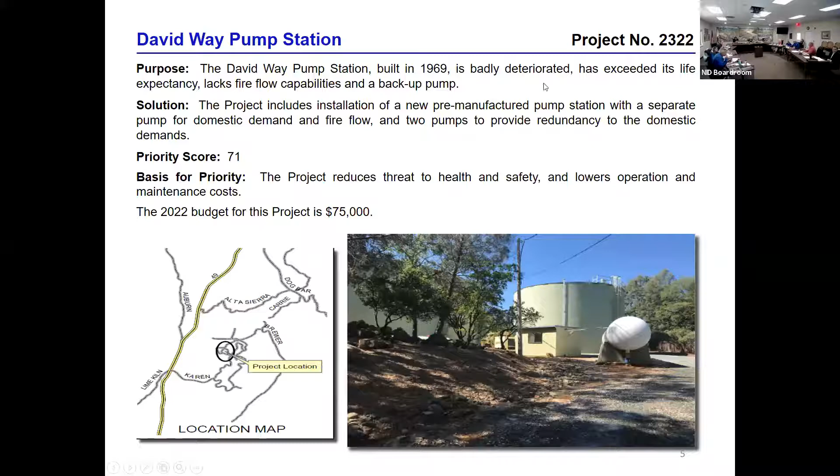I lost my train of thought. The clarifier and the paint, so okay. We'll be bringing that forward here probably in October, recommending that we use the money we had slated for this work to do the clarifier work this year. So, this work for Lake Wildwood would be for next year, which is the backwash pumps and the drying beds. We expect that to take place over a 2-year period, because we can do one drying bed at a time and ease through that, keeping the treatment plant running and continuing to move forward.

Any particular questions on that? Yeah, my question when I read this was, is this the big project that was proposed that needs to happen at Lake Wildwood Treatment Plant, or is this the interim fix-it project? The big project, capital, $6 million plus, rebuild of the whole thing? No, correct. This is not related to that.

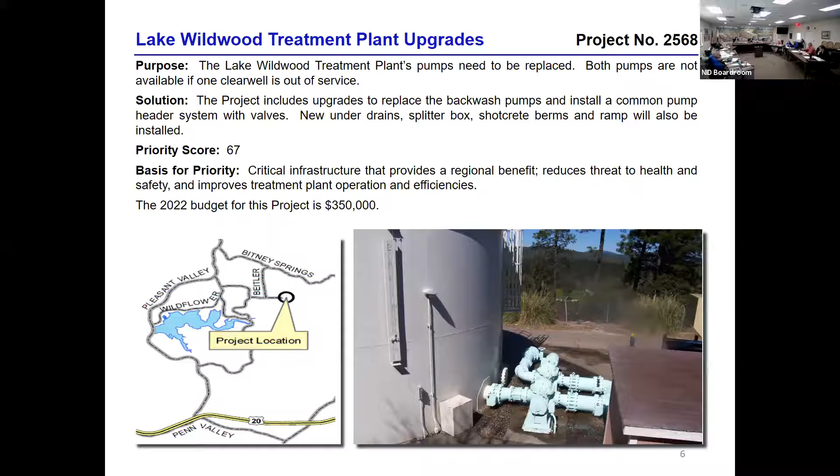This has got to keep it running. This was one that was originally identified as additional work that needed to be done when they did that review of the bed project. They identified the intake screen, as well as the drying beds and the backwash pump in the HDR report. That's why that needs to be done, and that's related to that. We've got the drying beds that are no longer really meeting requirements. Now we have to have membranes, and this one does not have those, as well as other drains that need to be installed and improved, et cetera. So that's just a little more background, because we're gonna be bringing something back to you with regard to Lake Wildwood and to clarify that.

So just to be clear, the 350 will replace the internal mechanism on the clarifier as well as paint it? No, the 350 you see here is actually for the drying bed and the backwash pumps that we're proposing to do next year. What we're gonna be bringing to the board in October, we had 600 in the budget to do this work originally, the drying beds, backwash pumps, and intake screen. We're recommending that we use that money this year to replace the internal parts of the clarifier, paint, clean, and repair the clarifier tank in this year's budget, because it's in pretty deteriorated condition. Once we pulled it down to do maintenance, we just need to replace the inside, and we can do that relatively efficiently.

Okay, so how much is that gonna cost? Well, it says right here, 350 or something. No, that's the confusion - we're probably in the 7 range ultimately for that one, on top of this 350. Because we have money in this year's budget for this work, as well as maintenance had money in their budget for the painting of the clarifier tank, so we're gonna be requesting that we combine those two and do all that work this year.

Great. How long does that likely push out having to spend the $6 million? At this point, we wouldn't be recommending that we move forward with an expansion of the plant. I don't think we're meeting the conditions, especially with the improvement of the clarifier and the surveys. Oh, that clarifies my question. Yeah, me too. Instead of $6 million, we're spending $1 million.

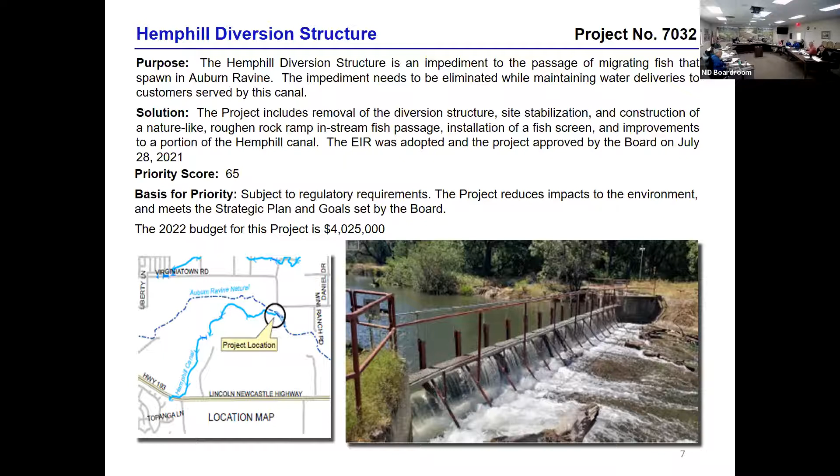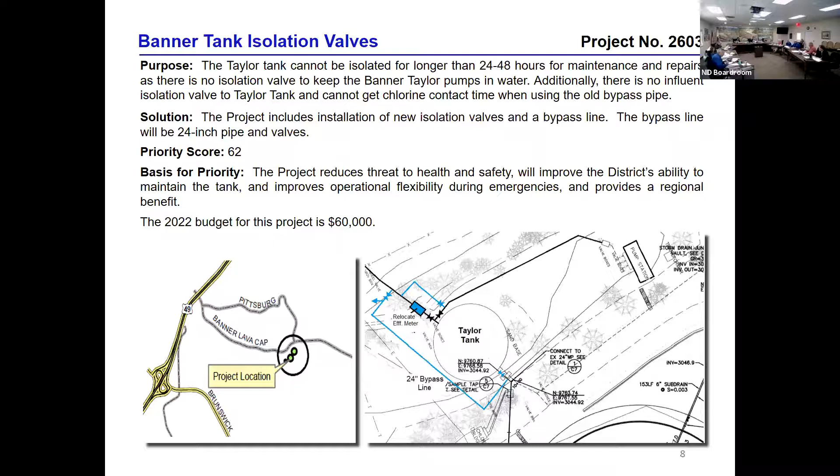Is this what we walk on every time we come here? Don't think about it, don't look at the pictures. I know, really—there might be another door you can go out. Yeah, I got it.

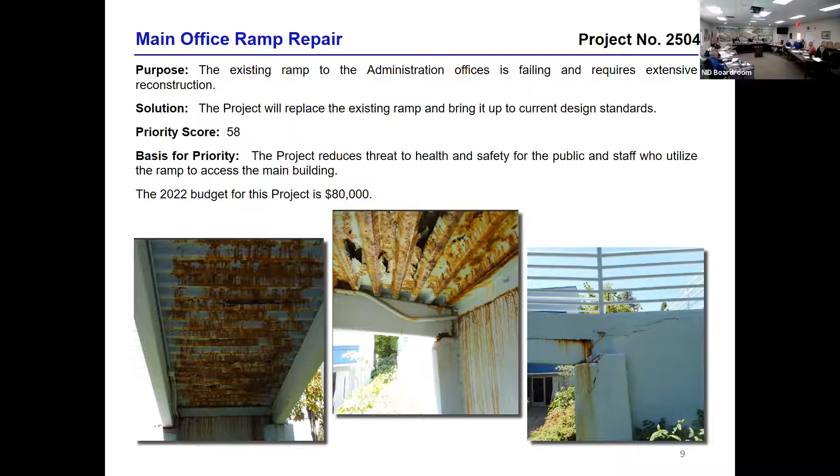Sorry, I lost it. Oh, back-to-back stuff, messing with me.

It seems like this is one that's been on the list for years. I've been reading about it on the current list, so it's fine. Part of it is we know we need Caltrans right-of-way, so that's a challenge.

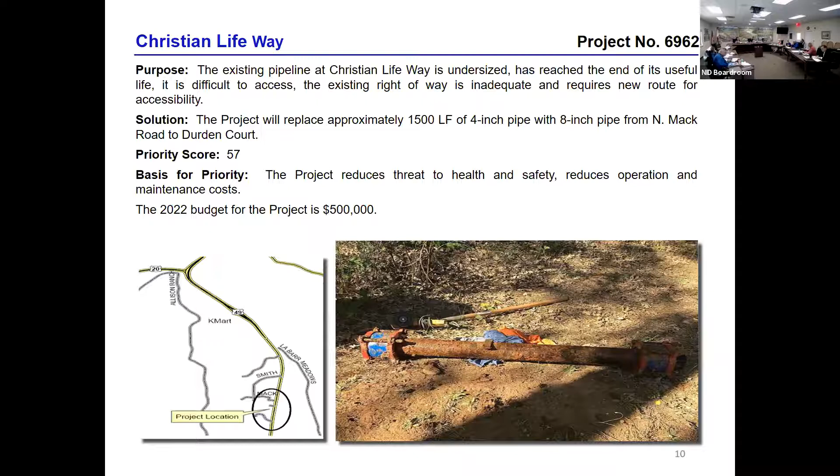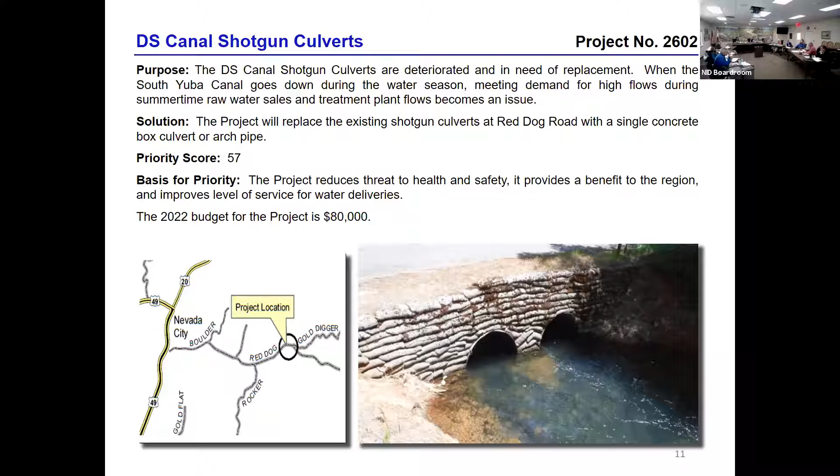Next one after that is North Bay. There's some pictures there, I believe, of this one—you kind of get a feel for it. Again, I think we have the same kind of issue with roots, et cetera, with this old AC pipe, which is—I'm assuming everybody understands what AC pipe is—for the most part usually installed in the 60s and 70s. That's asbestos cement pipe. So, how many customers are on this line?

So, there's roughly 50 connections on that line. And this one's a challenge too, because we're going to have to bore and jack under Highway 174. Yeah, oh wow, so not an easy one.

Right, which is why up on top we say we need Caltrans permits, and we need right of ways for that, which is why we actually only have 80,000 budgeted for this year. It's really just to get through the right of way issues and the permitting CEQA stuff, mostly the permit part related to Caltrans in addition to all the right of ways. And then we propose to actually build the facility in '23.

Are these two, this Christian Life and this one, ones that we would contract out or do ourselves? Most likely we would contract these out. That's the right answer.

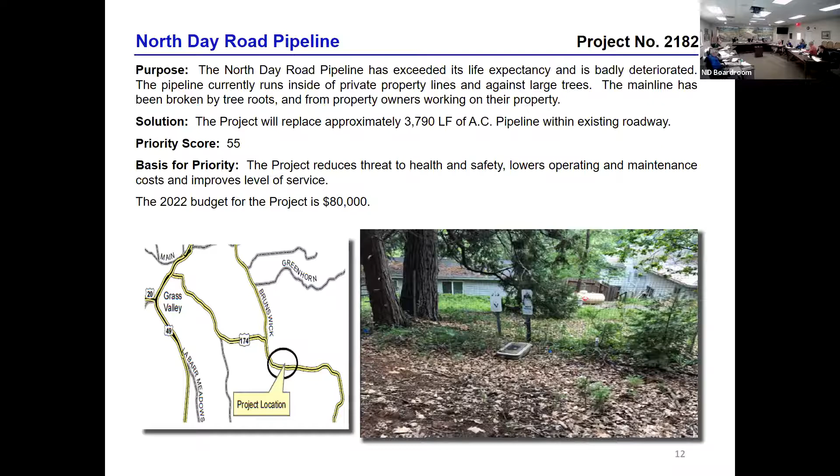Okay, next one, Pet Hill Extension. This one is a raw water facility that we have. We've got a 4-inch pipe. It does have a moratorium on this facility. In addition to that, we have issues with minimum freeboard, lack of flow, overtopping and other concerns that we have to deal with even with the flow we currently have. So we'd be upsizing that head gate, looking at improvements in that first section of the canal, making improvements to the culverts, maybe encasing a portion of this pipe or canal to better get the flows through this section.

Capacity, how much will it increase? It would be based on master plan flows. I don't know what that specific number is, but we base everything on, for design purposes, on what our master plan would suggest for each individual canal. So it would be based on that.

Should people on Pet Hill Extension start signing up now if they know they want more water? Generally, we encourage anyone who's interested or wants water to sign up immediately. We have a waiting list on any canal that's on a moratorium. This one currently has 27 accounts. Not huge, but it's nice to know the demand for the future, and the waiting list helps us determine, might help rank these a little bit better. They might get it, okay, I'll give them a call - then we notify them when the moratorium is lifted, they'd be notified.

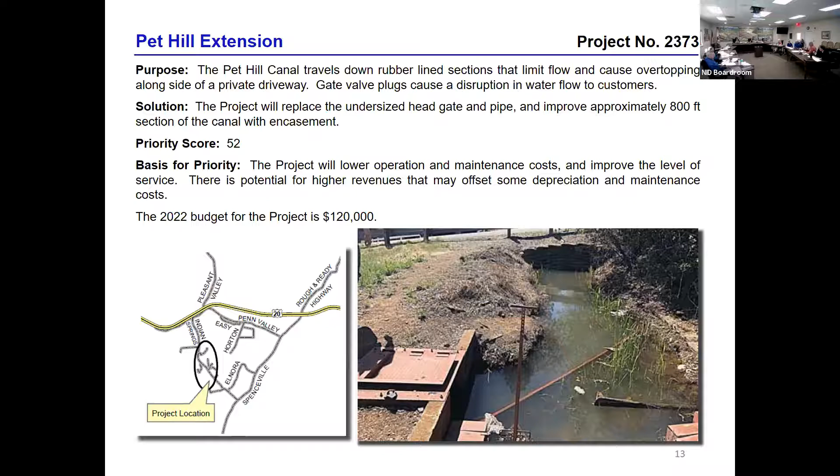So the next two, which I think are the last two, we've got Sugarloaf Reservoir, located just up there in Nevada City, off of North Bloomfield. A sinkhole appeared in that. We've got an embankment that's compromised and leaking. We went ahead and drained it or lowered it considerably. This is a facility that we no longer need - operations doesn't feel it's necessary anymore. I think it's about 6.5 acre feet or something inside the reservoir. So this project would basically just be to install a new bypass permanently around it, and just abandon the reservoir altogether.

Is it on our property? Yeah. Do we have to do reconstruction or? No, we would consider whether we want to knock berms down and do some final grading, or utilize that as an area for us when we have excess material from other projects to fill it in. It'll just kind of be a skate park.

And then the last one's Alta Hill Reservoir, similar in terms of the leaking, and it's not a facility that we need. I think it's a little over 7 acre feet for Alta Hill Reservoir. We've installed a temporary one around it and lowered the reservoir. We've been told not to drain it completely until we do a CEQA analysis to make sure we don't have any impacts, or if we have to mitigate, et cetera. So we'll start that process and then put in a permanent bypass around that. We will most likely fill this reservoir in to the location where it's at, and also install a measuring station just downstream of that location.

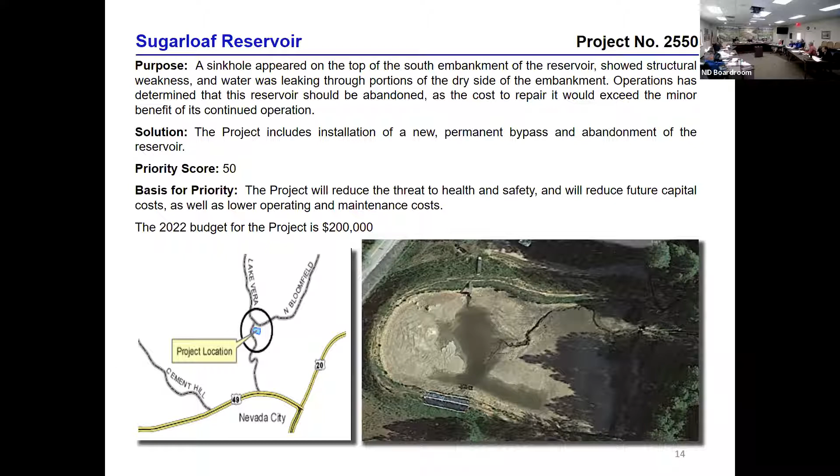How close is that to Hirschman's Pond? Not at all.

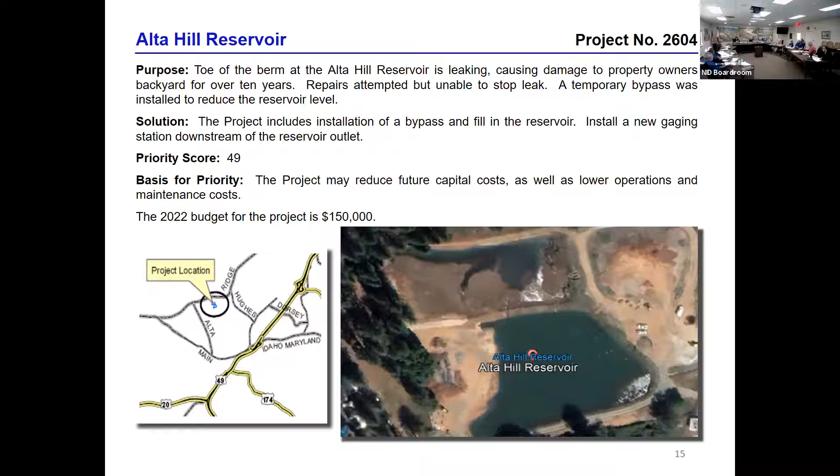Okay, I think I got through. Did. Waters. Okay.

Thank you, Chris. So this is just a summary of the project. What we would be proposing in this year's 2022 capital program would be roughly $5.7 million for all these projects. Oh, this is a sheet we don't have. Yeah, this would be good to have on that larger one. For the presentation, we put this one up here, which just gives you an overall view.

So the budget that'll come forward to the board in the future, if there's some adjustments made, we'll have that number in it. This year's 2021 capital budget was a little over $6 million, I think it was about $6 million. So we're slightly less than that, which is what we were trying to accomplish.

Okay, good job, thank you. Ken, all right, your turn. Doug definitely set the pace there at the end. I'll do what I can to move through these quickly, or whatever speed you're up to.

Still on 17. Yeah, but he's got twice the number of projects. All right, Chris, when you're ready.

We'll skip through these unless there's something we want to talk about in particular with the summary sheets here, but the same sort of information is presented on those. So Chris, can we go to the first project? All right, so the Scotts Flat spillway job, I think everyone's familiar with this one, so we don't need to belabor it. We are expecting the alternatives analysis report before the end of the year, so we'll have a much better idea of what that job is going to be here shortly. And just as a heads up, the current expected construction cost is on the order of $15 million, so as we're rolling through the rest of these, keep that in mind.

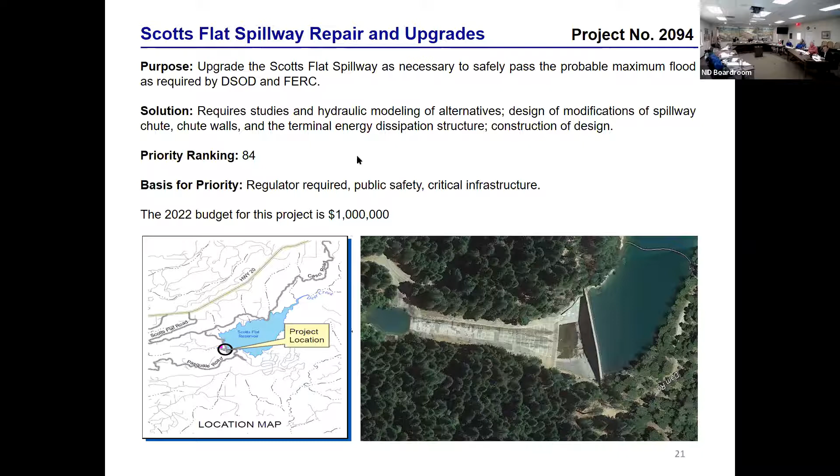All right, so next project here, this is part of a suite of three projects at the Chicago Park Powerhouse, and that's the transformer replacement, turbine overhaul, and then the rewind out there at the powerhouse.

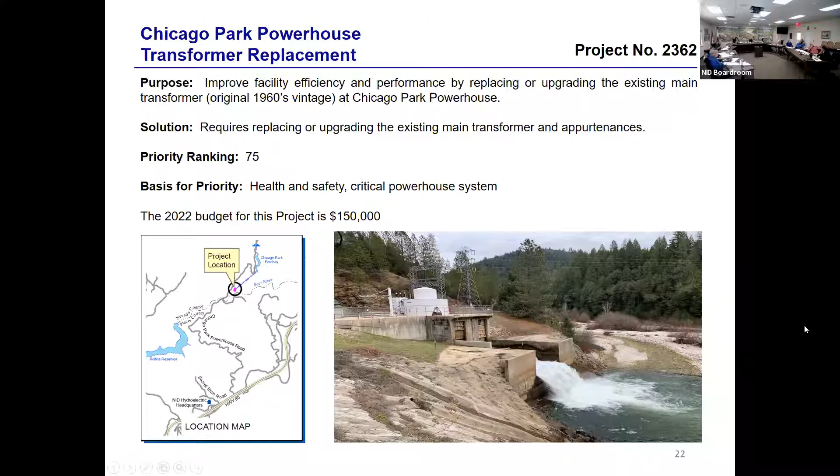These are traveling together due to outage considerations. We get a certain number of hours per year, and then every 5 years we can take these powerhouses down. One thing I wanted to highlight is that the transformer still tests well, whereas the rewind, the fourth or fifth job down here, is actually driving these. The generator needs to be rewound, all of the test results say that they need to be rewound. The turbine and transformers are being replaced because they're at the end of their useful life, as opposed to testing.

Mr. Judson asked about the rewind: what year was that original, sixties, seventies? No, the windings on there are from 1991, so it has been rewound. We rewind the generator to size roughly every 30 years.

I talked to a good friend, an engineer, this morning, and he said there was a period of time when all the rewinds had to be water-based and they started rusting. The new ones went back to oil-based, I think. He's in water pumping, and for 15 years the government forced water-based windings, and it's just rusting and rotting out. Yeah, I'm not aware of any problems like that at our powerhouses.

We've gotten our 30-year lifespan out of the last rewind and it's been excellent. They're saying older ones are better. Yes, that is true, the new ones are junk - well, not junk. There's kind of that middle generation that weren't necessarily great. The ones they're making now are reasonably good, better. But the older ones are superior. 30 years is an impressive lifespan on that. It is, yeah.

Do you think we can do all three projects in the time that the contract says we have to have an outage? No. So that is one of the things we showed when we were talking about the longer-term model, a significant reduction in hydro revenues in the year we construct this, because of the rewind. We have a certain number of excused hours, but we will go beyond that.

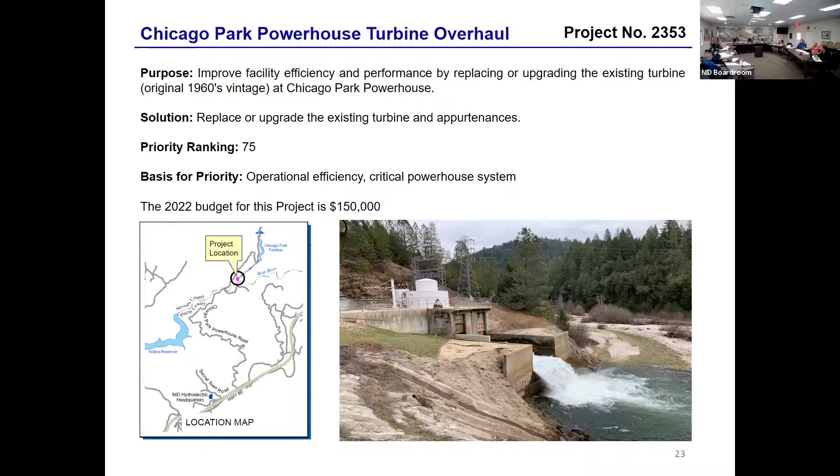Good information for planning, isn't it? Mm-hmm, yep.

So the next job is the Scotts Flat Dam wave erosion inspection. As part of our recent Part 12D independent consultant inspection of the dam out there, they asked why doesn't the riprap go up to the top of the dam during the probable maximum flood? You will have water near the top of the dam, so you need to put riprap up there. So we will need to go through that process.

What did you call it, a biblical flood? It's as much water as you can reasonably calculate being on the ground. But that is the design standard since Oroville.

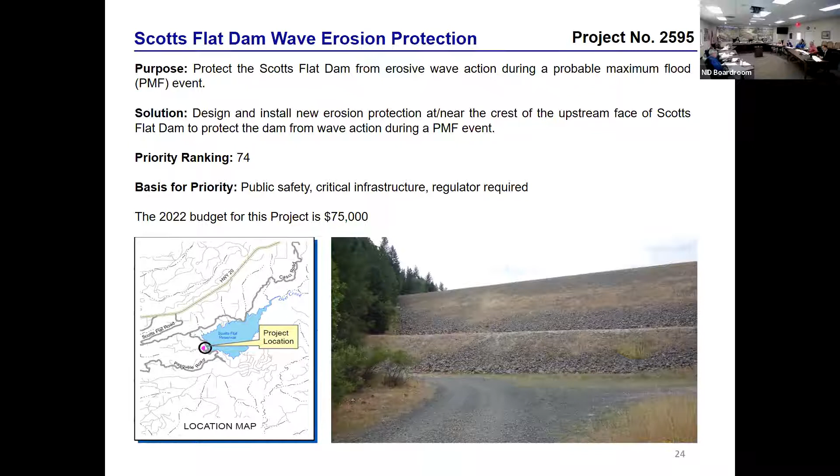Looking at the last picture on the page, the one that shows the riprap, you're saying you just have to add it to the top there or something? Side of the dam, yeah. One of the rough things as we pull this together, it's on the front. Oh, it's on the water side? Yeah, okay, that's it. Yep, we're supposed to catch that. I caught it right off, I said that's the downside.

So the Rucker spill gate replacement, this is to replace the radial gate you see there with an overshot gate. In this case, there isn't really an alternatives analysis that was done, we have other overshot gates on the canal, this is just the one that needs to get replaced. They are significantly safer for the employees and have significantly lower operational requirements. Essentially you just set it and forget it, and when the water gets high enough, it overtops and flows over. That's why we're replacing these, and you'll see later on there's the Christmas tree spill gate, where we're looking to design that and install it next year.

Is this a picture of the old one, or how a new one would look? That's the old radial gate, yeah. Is it failing or just a hassle to operate? This is a safety issue, so the current gate is still in serviceable condition, but it's a safety issue, which is why we're replacing it.

Safety for the operator, and for the facility - what's the issue? When we get a rain-on-snow event out there, we'll experience extreme increases in the water surface elevation. And it always seems to happen at 2 o'clock in the morning, so you have to call out an operator. Generally they'll get in the snowcat, drive out there, and make the regulation they need on the gate. The risk is if they don't go out there, it will potentially overtop the canal, and you don't want that.

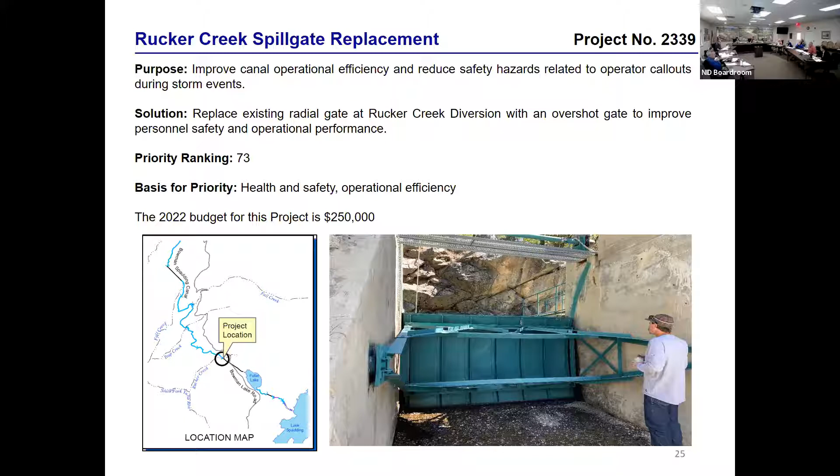So again, we talked a little bit about this - this is the generator rewind for the Chicago Park Powerhouse. This is a problem that needs to be dealt with. Those windings are testing bad, and it's time to rewind the generator.

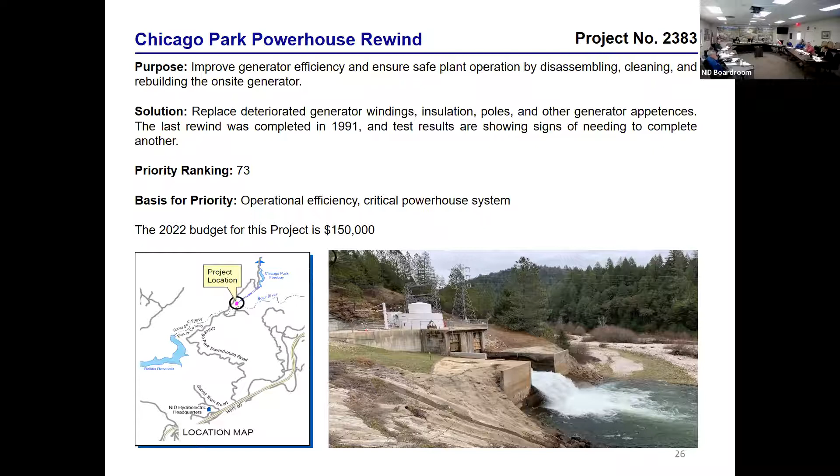So the Rollins governor replacement. The governor is what controls how much power the powerhouse puts out, and it brings the generator up to speed before we parallel to the grid.

I think this is probably a similar case to what Director Johansson identified earlier, in that we have the middle years of governor out there. If you've got one of the old mechanical governors put in the 60s, it's bomb-proof. If you've got one of the new current ones, it's computer-based and works real well. But there's this vintage from the 80s where they were converting between microprocessor-based and mechanical-based, and you just can't get parts for them anymore. They fail - this is a real problem for a critical piece of powerhouse equipment. So we budgeted to start designing that next year.

Didn't you show us the one in Chicago Park being one of those old ones? It is - an old arm going around and around? Yep, it's got the fly balls that come out, and it tells how fast it's going. It still works. The mechanically minded people are definitely drawn to those. And they work great, and you can still get parts for them - it's just this 80s vintage equipment that you can't get parts for. Kind of like some 80s cars.

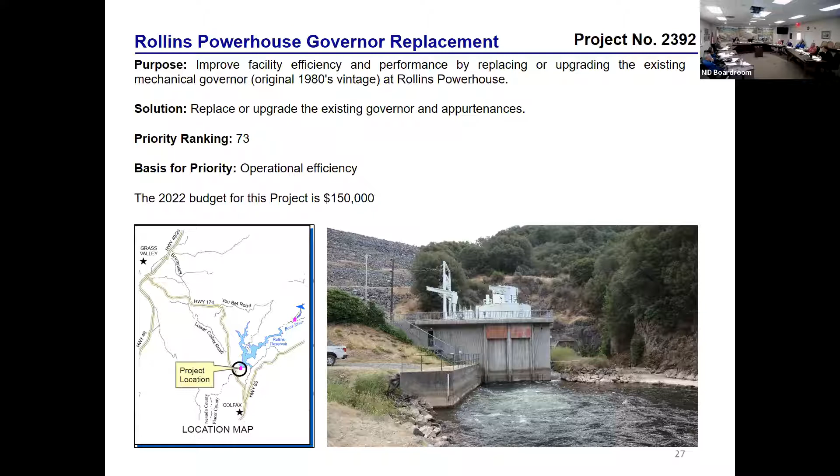Eighties anything. All right, great picture - spill gate. So this is another spill gate, same picture, same gate, same situation. Again, we had some trouble with the picture component of this - didn't have time to get the pictures taken care of. We'll work on that. So design of the gate next year, and then installation in 2023.

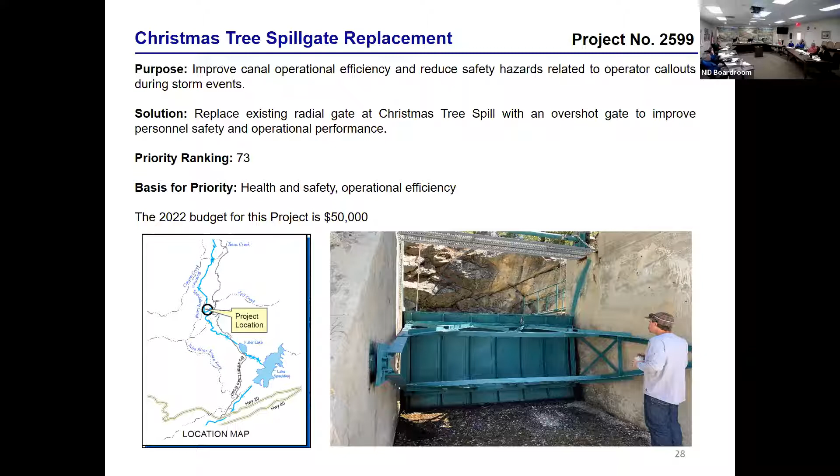Bowman North - again we've got a picture of the downstream side, and we're talking about upstream lining. The lining on the face up there is a lot of it is original vintage from when that dam was constructed in the 20s, and there's some significant concrete repairs that need to be made out there. We're anticipating this is going to take us a couple of years, and we'll approach it similar to Payne Bridge, where we go out there every year, cut out a section, replace it, seal some of the joints, and just move through it as the years go by.

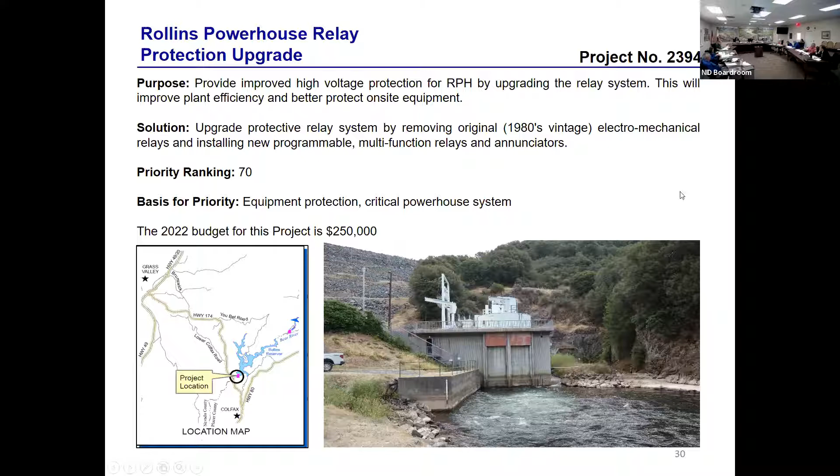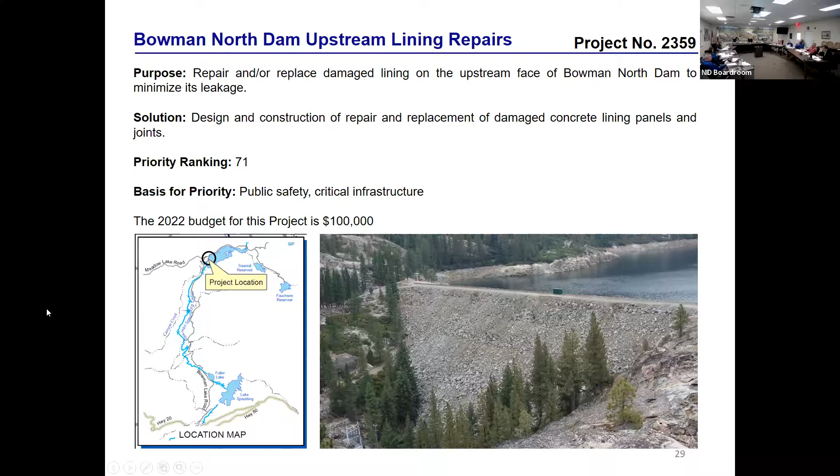Sawmill next? So the Sawmill dam outlet pipe rehabilitation, this is one where we don't have the solution yet, so there will be some alternatives analysis type work done. The original pipe in there is a riveted steel pipe that went in many years ago, and its condition is essentially unknown. We've inspected it, but it's not big enough to get a person up there, so we sent a camera up and took a look at it. We're going to have to do a whole lot more investigation to determine the actual repair needed out there. So this is the budget to get that job started. This is going to be a regulatorily required project, and we'll figure that out and be back with the actual solution as time goes on.

I feel most of these projects don't have CEQA. It seems like this would have CEQA associated with it, since it's a rock dam. It's a replacement, just a replacement of the outlet pipe. This would be as simple as... looking at the setting, it could be very straightforward, but we just don't know yet. You had to do a bunch of work in the stream channel below, or something to that effect?

Yeah, I wonder if we should maybe put 'to be determined' or 'exempt' instead of just leaving it blank. Then my question is, how would you come up with a dollar estimate for these if that's the case? If you don't know whether there's... if you don't know, how would you?

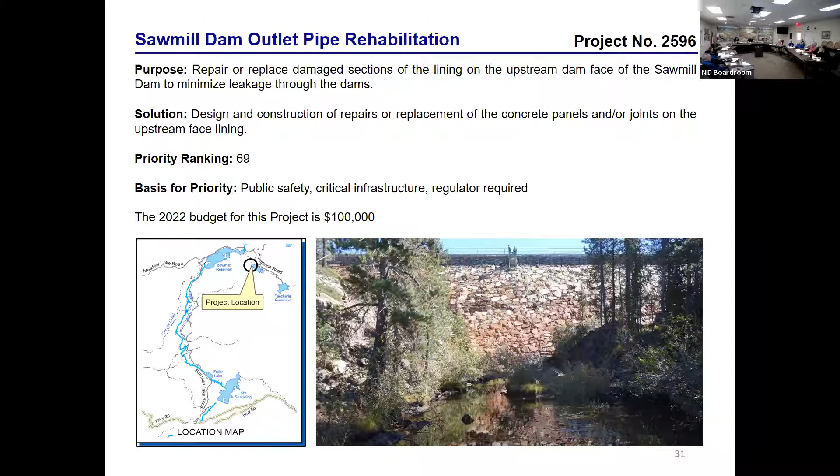And I think that this one may go away. If we get the right technology down there and push the pig up there and it says you've got 3/4 of an inch of wall thickness here, the coating is in good shape, then this may not come back at that point. So we're just trying to give you the best estimate, assuming a whole lot of variables along the way.

Okay. Cool looking dam.

All right, so the Fall Creek flume improvements, again, there's money in this year's budget to buy the flume sheets for this job. You'll see that in the October board meeting, the purchase of the materials to do that. The money for next year is the installation money.

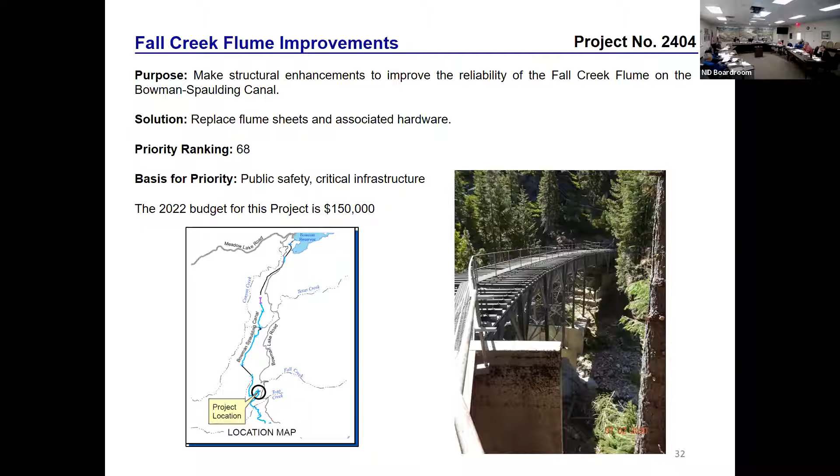Look at those trees. So this is the replacement of the capacitor bank at Combie North. We're experiencing significant failures out there. The capacitor bank adjusts the quality of the power that comes out of the powerhouse. The bank that's out there now is about 10, 12 years old, and it's at the end of its useful life. So this will replace that equipment out there.

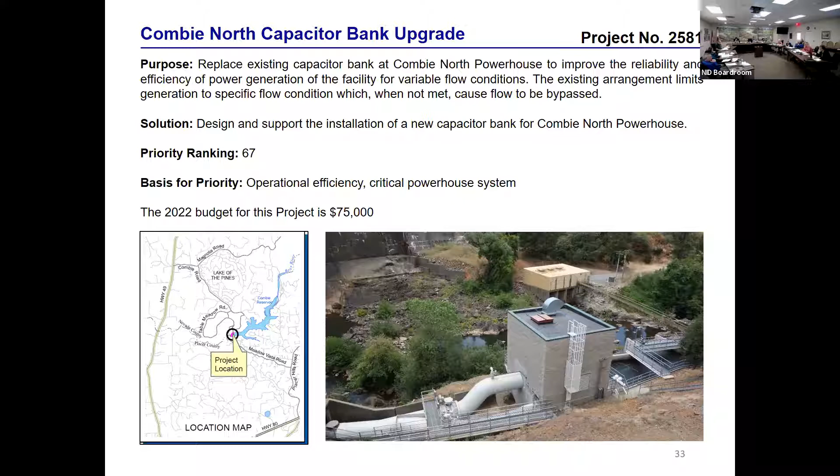It will also allow us to run different flows. PG&E has some interconnection requirements that we have to meet, and with the current bank out there, you get 3 settings, and if you can get there in the middle, then you can meet PG&E's requirements. The bank that we plan to install would allow us to operate through just about any amount of water that would come through the powerhouse easily. We've been running into situations lately where we have to turn the powerhouse off and bypass water because we can't meet the interconnection requirements. That'll be with that.

All right, so the RTU replacement of power at the Chicago Park, the RTU is a remote telemetry unit. It's a piece of computer hardware that essentially talks to all the other pieces of computer hardware inside the powerhouse, takes that data and ships it off, so you can see it and operate it remotely.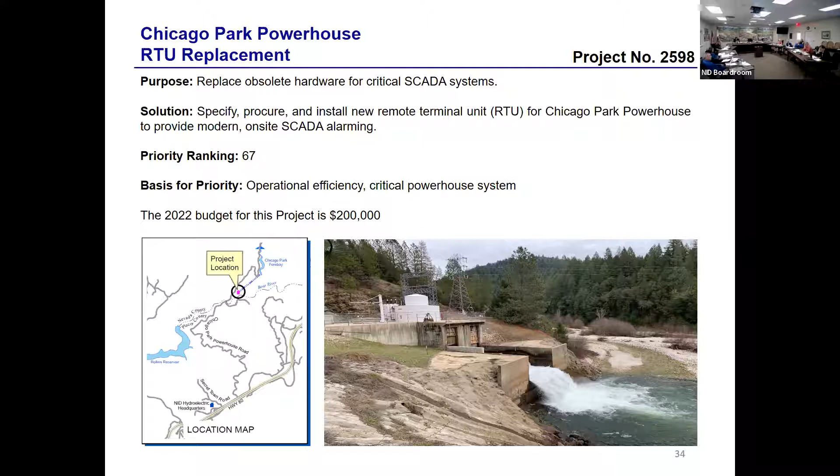I had a question about Dutch Flat and Chicago Park, they were built at the same time. Yep. So what about the major upgrades for Dutch Flat? We're talking about Chicago Park. So Chicago Park, so the cooling water specifically, or? No, the major one.

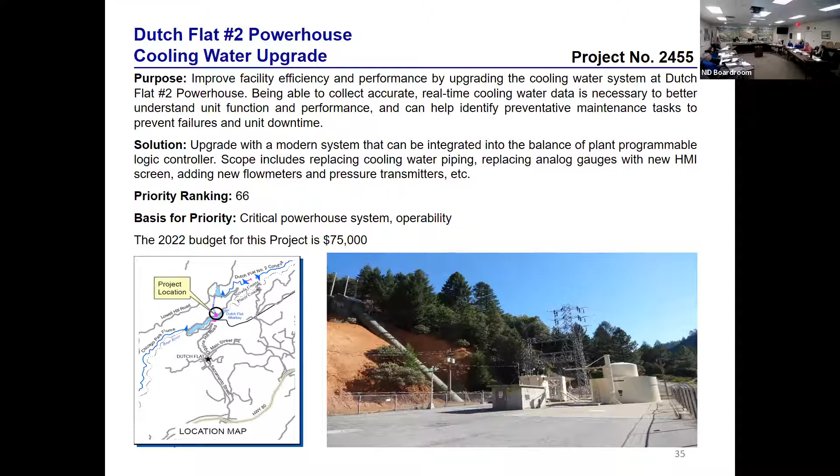The transformer at Dutch Flat is, again, at the end of its useful life if you look at the charts, but it's still testing well. Dutch Flat was rewound in, say, 2011-ish. So we've got quite a bit of time left on that, and we're not having the same sort of mechanical problems there, so we've got time on that one. And it's still, the windings are still testing well.

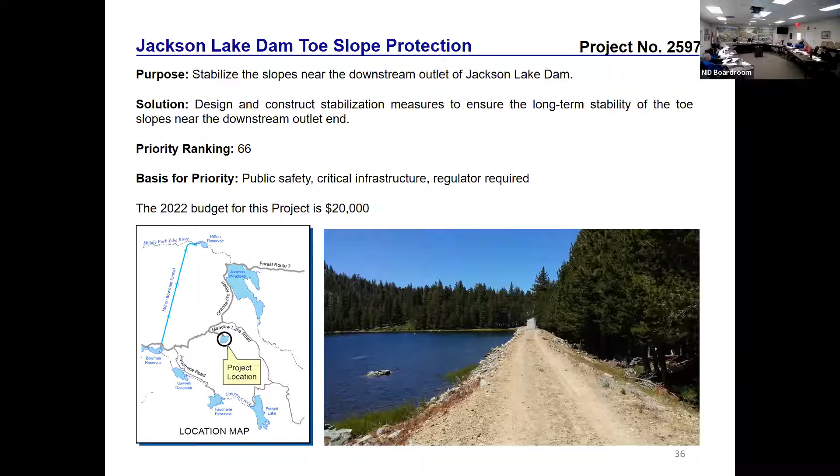Jackson Lake, toe slope protection, again, this is going to be required by the regulators. We're seeing some sloughing near the outlet there. This is a really minor project that's going to be complicated by the fact that it's a very remote spot, and it's going to be difficult to do from a construction standpoint and getting everything dialed in there. But again, it's going to be required.

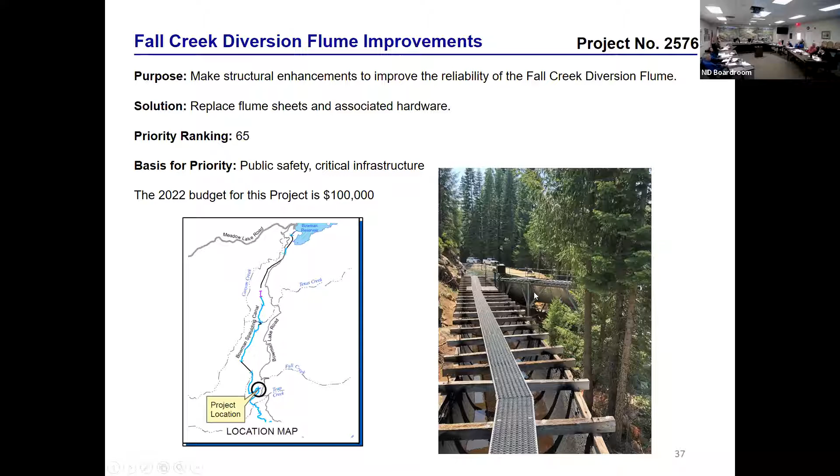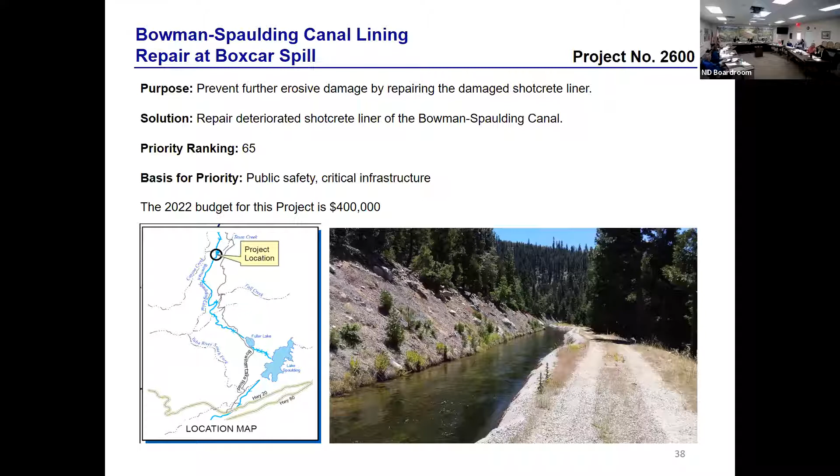You won't say who. Allegedly.

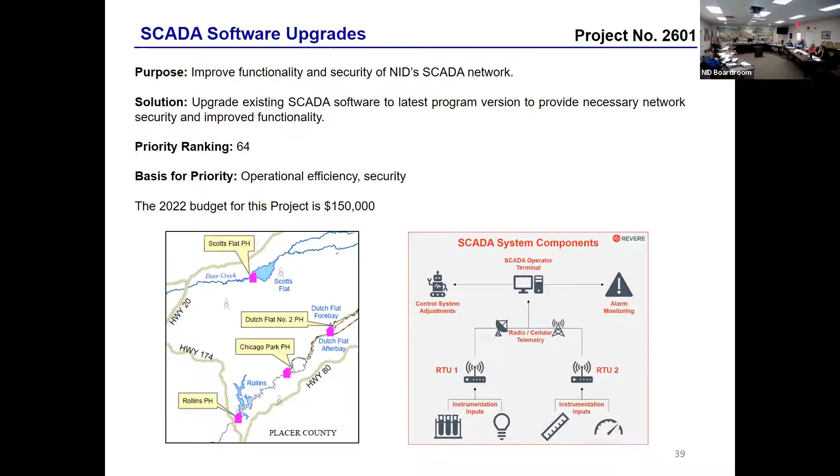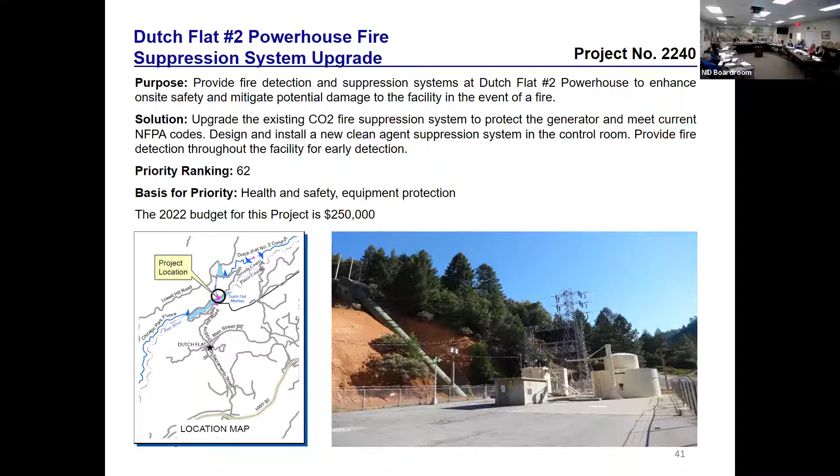Needs to go away, man. It's been going on for a long time - the same old right-of-way issues we talked about.

We have gotten a counter offer from the property owner with regards to what they'd like to see done, so we'll get back out and do that.

We've been in negotiations with the property owner to get the new right-of-way. We did a formal offer, and now they have come back with a counter proposal that we're looking at, and then we would go back. At that point, I think we need to all sit down internally and talk about what the next steps are. If we get to an impasse, then there's the next steps we would have to deal with regarding that, which would involve the board.

This is the people that don't want the road going by their house. Part of that existing one, we're trying to get a new one, a very small piece of property, so we can access our own property and build our road onto that and get it down. It's that little component there.

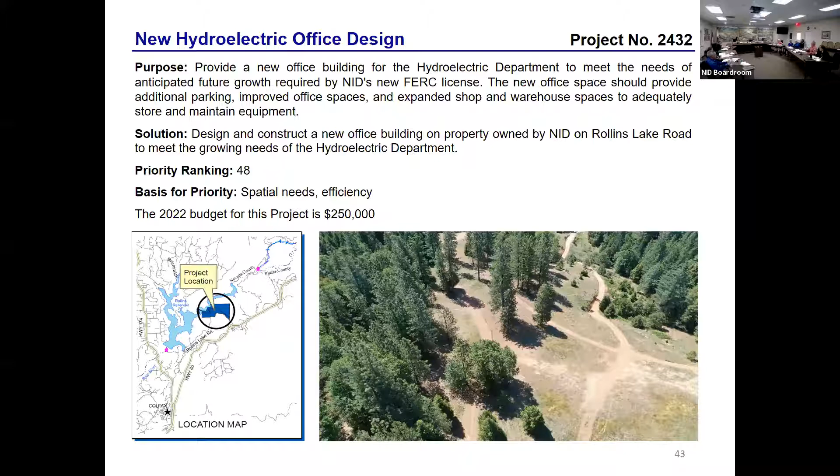Ken, I noticed on your sheets that 'constructed by' included NID staff. I'm just wondering if the budgeted amount includes the allocation of staff time to do the work, or is that outside consultants and materials, etc. So the dollar amount you're seeing is only external costs. The internal cost would be addressed in the operating budget, or absorbed by the operating budget, probably a better way to say it.

Is that one of the things that is, let's say, part of maintenance that's doing work to support hydro - is that part of what will, in future years' budgets, be allocated to hydro as opposed to the time being recorded but not allocated to the budget as it's currently done?

Correct. When we get a little bit more sophisticated, in the capital program we can have individual staff - we can still do it today, charge to the project, and then the hydro fund we can do a transfer back to cover the staff costs. There's a couple ways you could do it. You could direct allocate staff to different funds. We have a habit of saying water only is in water, and hydro revenue is only in hydro, and it doesn't necessarily have to be that way. You could even have split funds of people.

Exactly, yeah. A busy year for everybody. I know, and I know this is a lot of work, so I appreciate it. Yeah, congratulations, it's really great.